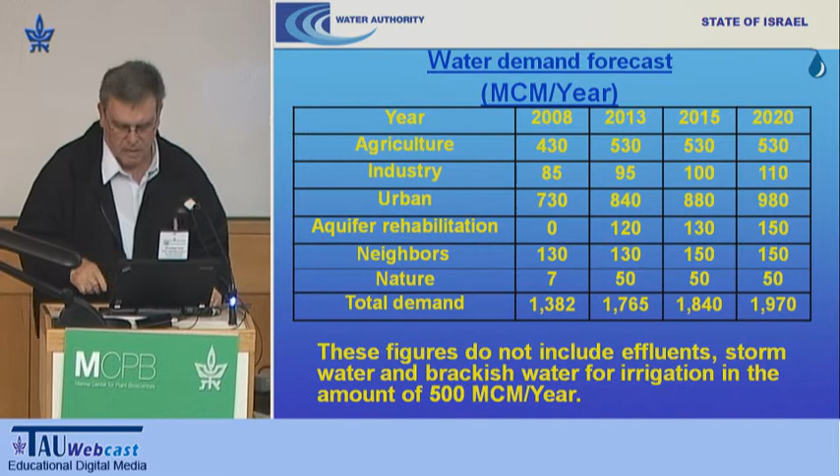Now on the other end, we have the resources. The resources in this number is not the amount of water that goes into the Jordan River. This is the refill in all our aquifers in Israel. We don't have here only the refill in the eastern aquifer of the mountain aquifer, but all the rest, what we have and what we are using in Israel. This is the average: 1.17 billion cubic meters per year.

So this is what we have. It's just an example. This is the forecast. This is the actual number we received in 2008. In 1 year, we missed more than 500 million cubic meters. 1 year. So we need to do all kinds of steps. And desalination is not the first step, it's the last step. Desalination is not a goal, it's just a means in order to close the gap. But we are doing other steps in parallel, and I'll talk about it.

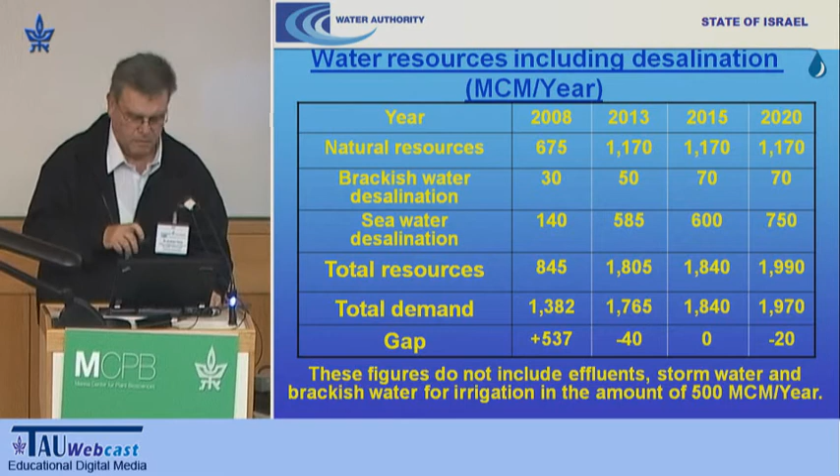It means it will not allow us to fill the aquifers, but at least be able to be in a situation that we have enough water, not to take more from the nature than we need, not to overpump ourselves. So this is where we want to be. I'll come back to it in a minute.

Now, in the past, we had a wonderful technology, since you are people that are talking also in technology, so most of them know the technology. Moses, our ancient leader, had a very wonderful, very good stick. He needed water, just hit the rock, he received water. We are still looking for the stick, so if anyone sees it, we'd like to have it. Unfortunately, we don't have it anymore. We need to do some other things in Israel. So what are we doing?

The first thing that we are doing, and we are doing a lot on this matter, is water saving. And when we are talking about water saving, we are talking first of all about education. We are giving lectures to the kindergarten, the elementary school children, high school children, then students in university, to be in a situation that the next generation will be adults that know how to treat water.

I can tell you, when I was in October in Paris, and Paris doesn't have a problem of water, I found myself in the hotel room. When I brush my teeth, I close the tap in the hotel, and everyone that visited Paris knows that water runs in the streets. This is the way they are cleaning the street, running water there. So the first thing is education.

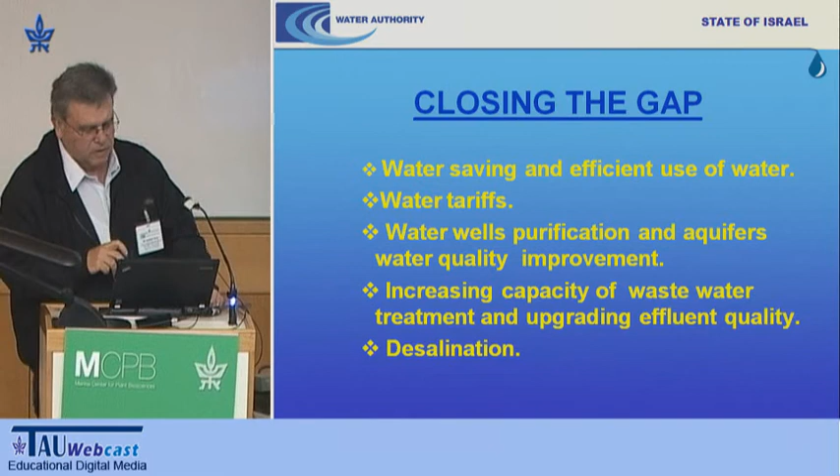The second thing that we are doing in this matter, a lot of PR, a lot of appearance on TV. Everybody remembers the nice girls that were becoming dry on TV because we really didn't have water. We are doing a lot of things. We are fighting against the water losses in pipes.

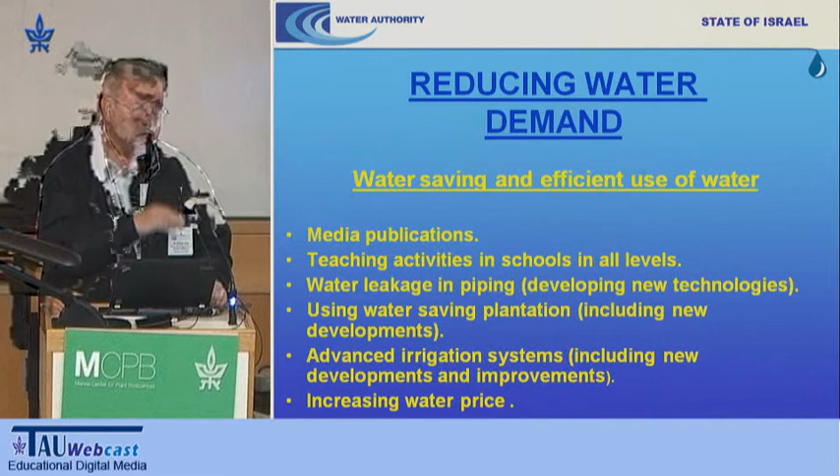In Israel today, our average water loss in piping is about 10%. This is a wonderful number. If you compare it to our neighbors, Jordan, Syria, it's about 40%. But not only them. Take London. London, about 40% water losses. London built a desalination plant because they don't have enough drinking water. Amazing, London. So water leakage, 10%, but we want to cut it down. It's still a huge amount.

Then we are doing a lot of work, all kinds of genetic engineering and other methods, to get not only the agriculture, but also the private gardening, to get plants that use less water. Irrigation systems. The drip irrigation was invented in Israel. Drip irrigation is very important in Israel. In Israel more than 90% is drip irrigated. In the United States, they don't reach 5%.

I visited Arizona last May. I was asked to tell them, why can we build desalination plants and they can't do it? I went there, I drove through the desert, and what I saw was amazing. The farmers there, the irrigation is flood irrigation, the same that is done in the rice fields in China. Go to Arizona, go down to Tucson, drive through the desert, you'll see amazing things. From the Colorado, they open a gate and they flood the area. No drip irrigation or nothing, because they don't pay even 1 cent for the water.

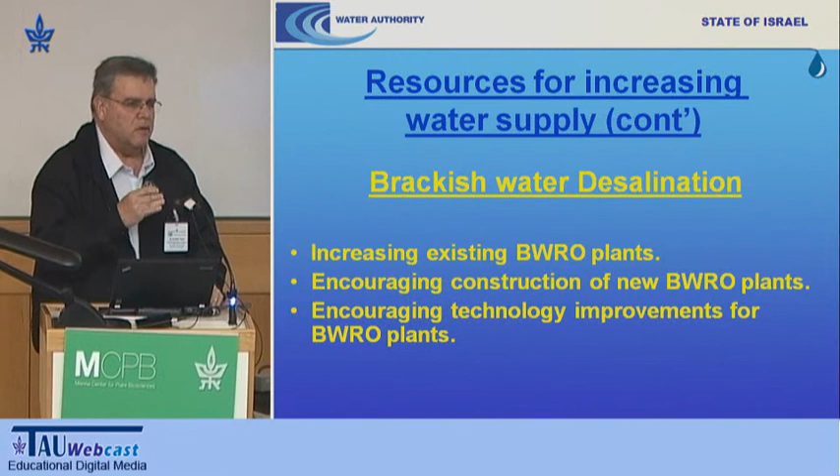Then, again, it's not enough. The gap is still too high, and that's why we went into large-scale seawater desalination, because we had seawater desalination for many years in Eilat. We had a small plant of about 2 to 3 million cubic meter per year. We still have such a plant in a different technology of seawater desalination. But to go into large-scale desalination, the decision was made only about 12 years ago.

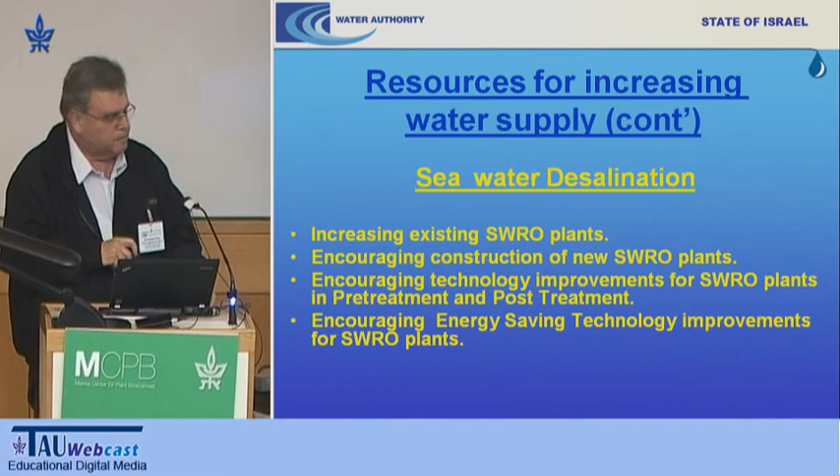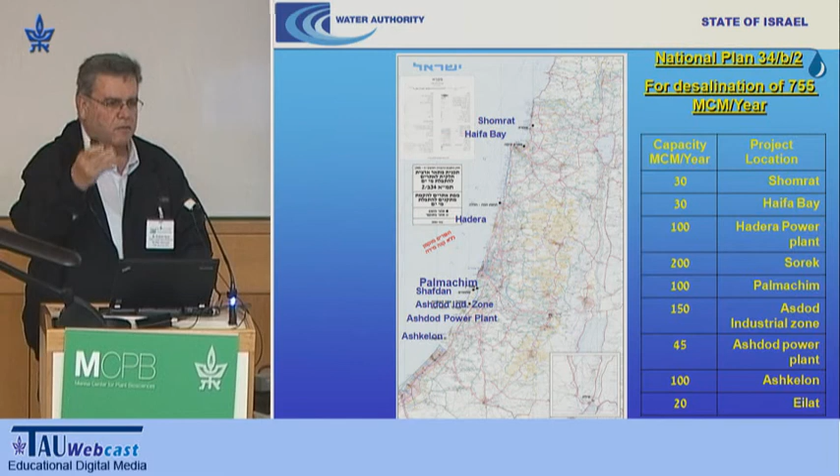To go into desalination, I'll talk about it a little bit later, we need space. We need area. Desalination plants take space. Not as it's published, it doesn't take space from the coast. Most of our plants are far away from the coast. Our new plants are about 2.5 kilometers east of the coast, but we need the space, and for the time being we have a national master plan where we can allocate desalination plants in different areas of Israel. This plan consists only of a possibility of about 750 million cubic meter of desalination. So we are now running a new master plan in order to have enough space for the next 50 years.

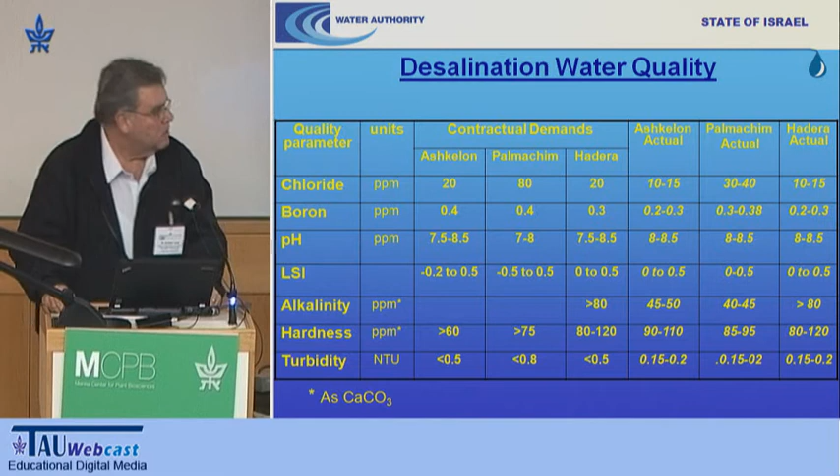A word on the quality of the water. Our drinking water today has average chlorides of about 270, 280 milligram of chloride. Then the addition of salts in the city brings us to effluent with about 400, maybe 450 milligram per liter of chlorides in agriculture, which is a huge amount of salt in agriculture.

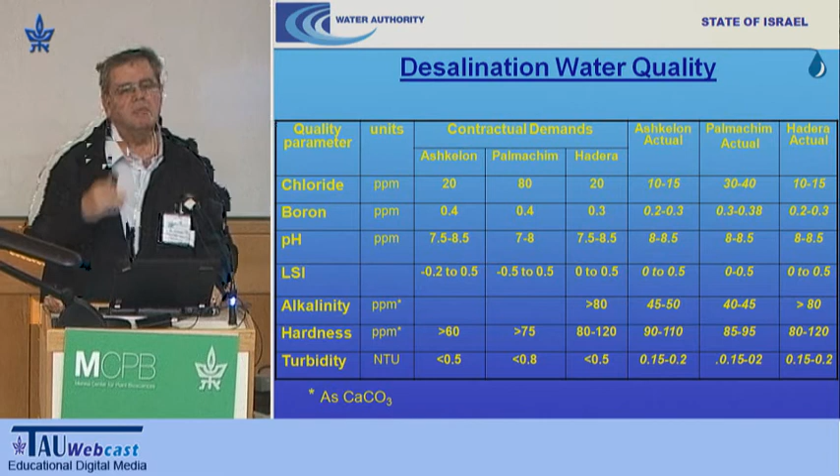By going into desalination and going out from these plants with about 20 to 30 milligram per liter of chlorides, the effluent will have less than 200 milligram per liter of chlorides. And there is very interesting research showing that if you go to the field with less than 200 milligram per liter, you get a better yield of the crops by about 15%, without adding any fertilizer, only because we are reducing the amount of chlorides, which means reducing the amount of sodium in the irrigation system.

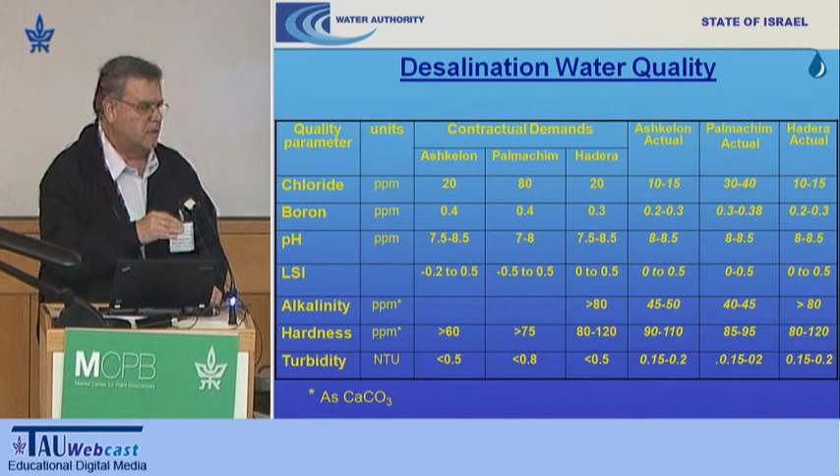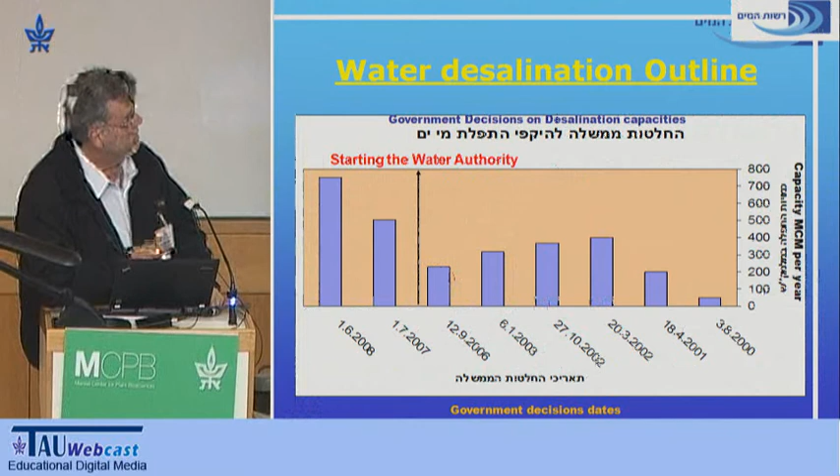But the government decision went up. This was 50 million cubic meter per year. In 2002, the decision was to go up to 400 million cubic meter per year. But then the years of 2002 and 2003 were rainy, a little bit more than average. And you can see they started to cut down by decisions the amount of desalination.

In 2006, we started already the series of drought years. This decision was to cut down desalination to 260 million cubic meter at all. That's it, in this number. And at this stage we only started to produce desalinated water.

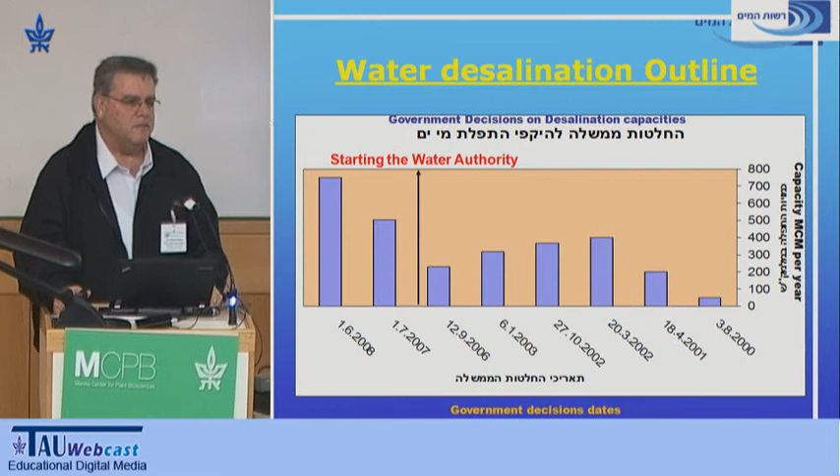Only in 2007, after the Water Authority was established and decided to cut the linkage between the governmental budget and the investment in the water sector by increasing the price of water, and this is going to be the base for every investment in the water sector, we succeeded to have the right governmental decisions, and the last decision is to reach 600 million cubic meter by the end of 2013 and 750 by the end of 2020.

How do we do it? Today we have already 3 plants in operation. We have the Ashkelon plant that started as 100 million cubic meter per year, which, when it started its operation in 2005, was the largest reverse osmosis plant in the world. It was the biggest one. Today this plant, Ashkelon, is producing 120 million.

And of course, all our plants are with reverse osmosis technology, and maybe you know that the person who really started with this technology and brought it to all of us was Professor Sidney Loeb, an American Jew who immigrated to Israel in the late 60s. He was really the one who started it. Unfortunately, he didn't write a patent on it, but he is really the father of reverse osmosis, and today more than 60% of the desalination in the world is with reverse osmosis.

The second plant, Palmachim, started at 30 million cubic meter per year. It's now producing 45, 50 million, and we are now increasing the capacity to 90 million. This is being done now. The third plant started in Hadera. Ashkelon started 2005, Palmachim 2007, Hadera started in 2009. It is 100 million cubic meter per year, but it's already producing now 130, and it is now the largest plant in operation in the world.

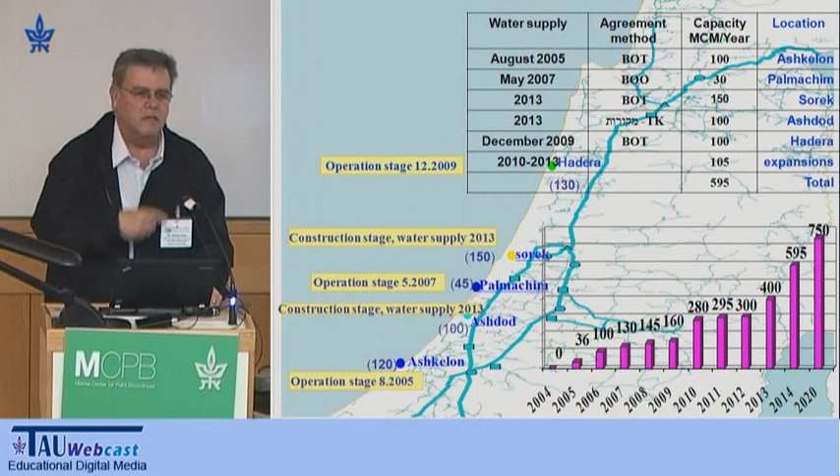Now Algeria is starting to operate a plant which is going to be about 140 million, and we have now the Sorek plant, which is going to be our next plant, at 150 million. You know, we have a hummus war between us and Lebanon, so in desalination we have also something like this. And beside Sorek, which is going to operate beginning of next year, we have another project in Ashdod, another 100 million cubic meter per year that's going to produce water by the end of 2013.

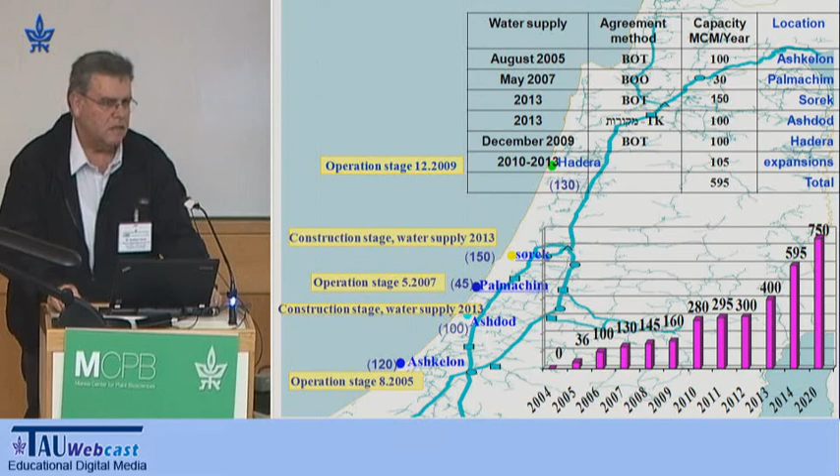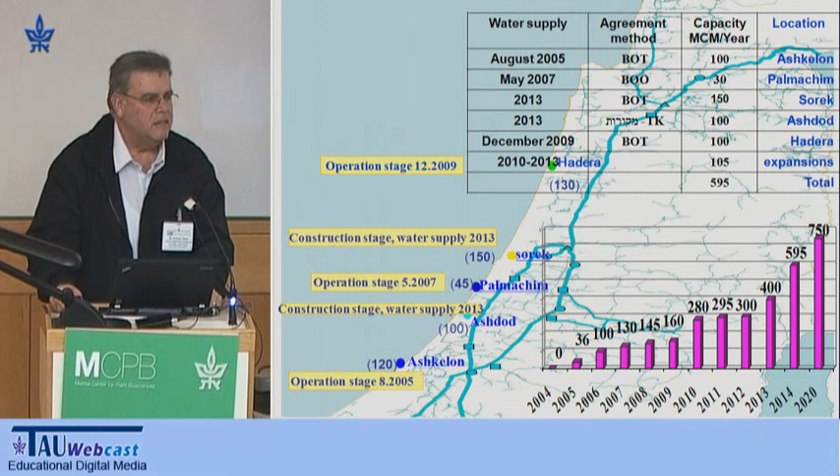So today we have about 300 million cubic meter per year of seawater desalination and another 40 to 45 million of brackish water desalination, altogether about 340 million cubic meter per year already running in the pipes. And maybe a small mistake was made here, we are pumping from the Kinneret in the last years only 150 million. This is what we are pumping out of the Kinneret. So by producing this amount of water, we succeeded probably to build 2 new Kinnerets in Israel.

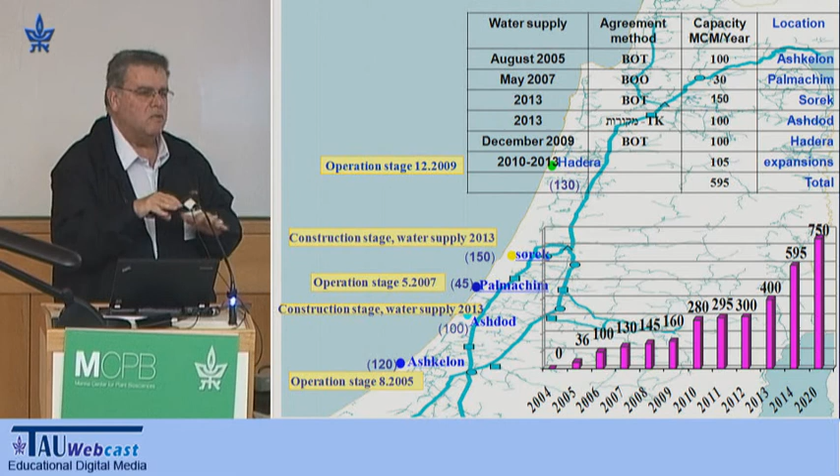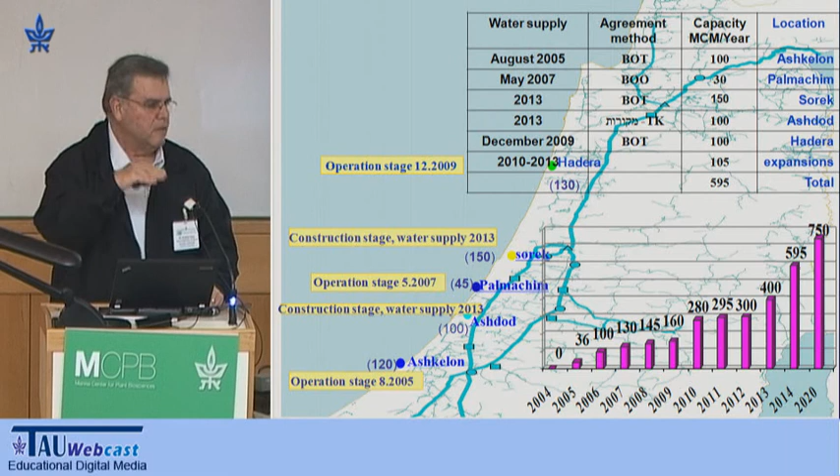And with the new plants by the end of 2013, with the addition of brackish water desalination, we will reach about 660 million cubic meter per year of desalinated water. So at that time, we will have the amount of water not only to close the gap, but also to start to pump less from the Kinneret and from the aquifers, by about 200 million cubic meter per year, and that will allow us to build up the storage that we have been missing for many years in these areas.

Just a word: in order to be able to send this water everywhere, we have a national grid. Fortunately for us, we have a national grid that was built 50 years ago. And at that time, this was the only means to get water wherever we need in Israel. So this national grid that started in 1954, 1955, is still working now, but the big problem is that it was built as a telescopic pipe from the northern part to the desert.

Now today, when we are going into desalination from the west, we are doing a huge project of changing the directions in the national grid to the west, to the south and to the north. It means we are changing direction in the national grid. This project alone is a project of about 15 to 20 billion shekel for the next 10 years.

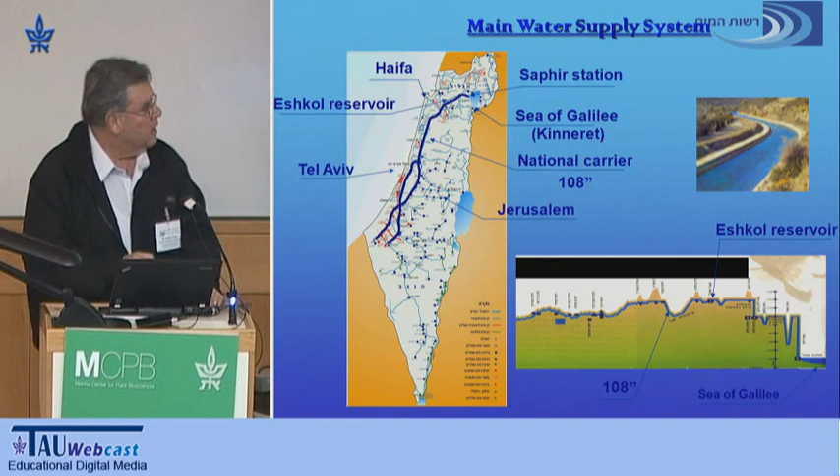I'm just jumping over all these interesting things.

Energy. Just a word of energy. Wasn't it smarter to build the desalination in the north? It's a very nice question. We are trying for 3 years. First of all, you build desalination where the demand is. Most of our population doesn't sit in the north. Unfortunately for us, it sits near Tel Aviv. So there is the major capacity.

We are trying to find for 3 years a location in the north, in the western Galilee. 3 years. We didn't succeed to find 100 dunam in Israel. I would like to get all the assistance we have in this matter, but it's not so simple to find 100 dunam in Israel, and the big problem is that nobody wants to have it in his backyard. You know, NIMBY. So this is a huge problem. Everybody wants water, but build it in the neighbor's garden.

A huge problem. Energy, and everybody says that desalination is a huge amount of energy. So let us make things clear. In Israel, not only in Israel, the same in the United States, about 40% of the electrical energy goes to air conditioning. More than 40%. All the water sector in Israel is today about 6%, 6.5%.

All the water sector. If we'll cut back 1 hour of average air conditioning, home air conditioning, that's enough energy to produce 1 cubic meter of desalinated water, which is enough for 1 week for us to live. 1 week per person, 1 hour of air conditioning. So if you want to look where the coin is, the light is in the air conditioning, not in desalination. Cut a little bit back the air conditioning.

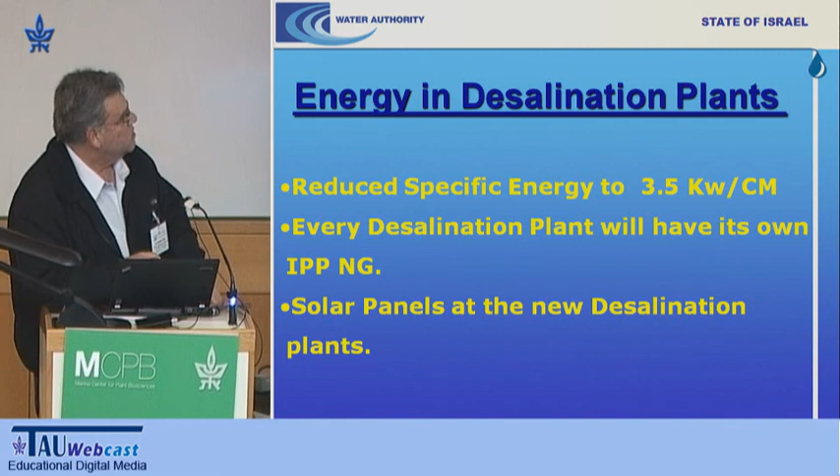We have more than enough energy, but it's not enough. We are doing several things that I'm not going into. We're going into renewable energy. We're going to use natural gas. We have already one desalination plant with a natural gas power plant, which also helps. Again, I'll not run into this.

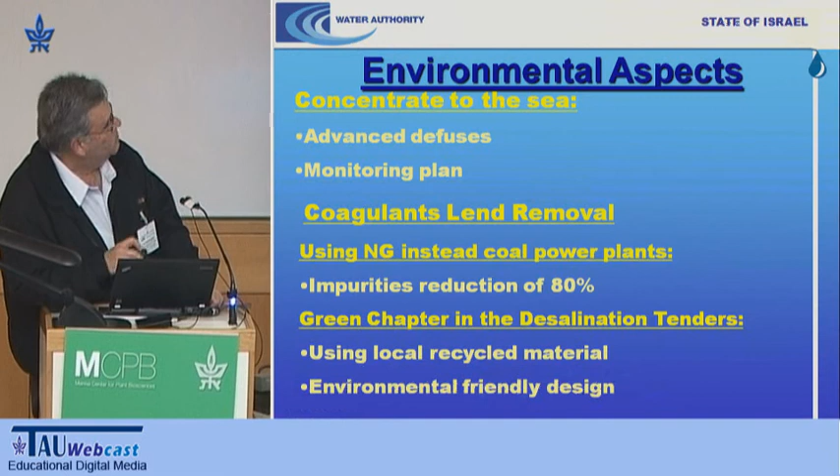Sorry, the last word I want to talk about is the real environment. Usually I give environment more than 1 minute, but here I'll cut down. Environment. The desalination plant, of course, has an impact on the environment. Mostly it is the energy. Of course, you need energy to operate such a plant, but we are also sending concentrate into the sea. The concentrate that you are sending to the sea is about twice the average concentration in the sea.

It goes into the sea. It has a huge dilution effect. We have a huge debate with all the environmental guys in Israel. We believe that the effect is not so big. We are monitoring it all the time, not we. The Israeli government and all kinds of Israeli entities are monitoring it. We do see a dilution zone where the concentration is a little bit higher, and I'm talking a little bit higher is between 2 to 5% more than the average salt in the sea.

Again, for each huge desalination plant, this mixing zone is about 200 dunam, 200,000 square meters. That's it. It means when we reach 1 billion cubic meters of desalination, we will have an influence of about 2 square kilometers, out of a few thousand square kilometers in our seashore. But this is something that we need to monitor, we need to take care of. We don't know enough yet on this matter.

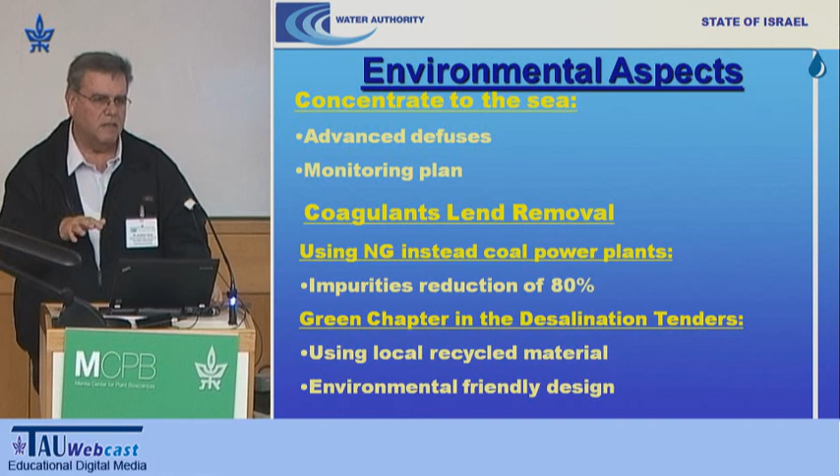Thank you, Avraham. I'm very happy that you have been considering at least 1 minute the environmental consequences of the long-term effects of desalination. This is one of the main concerns of the environmental groups. But we have time for one question. You want me to ask a question?

Yes. How long will these plants last, and what will be the cost once the government gets them? Okay, these plants need to last as long as possible. After 25 years, when the government is going to get them, they are going to get them in the best operational situation. It means we're going to get plants that are maintained and operated in the best way, and we are controlling it all the time. This is part of what the WDA is doing, controlling the way that the private sector is working so that when we get it, we'll get a very good thing.

But in 20, 25 years, technology can change, all kinds of things can change. We'll need to do other things, but I believe that these plants, as they work, will still work. Look, reverse osmosis is not a new technology. The new technology is 40, 50 years old. In the water sector, technology doesn't change quickly. So we believe that in the next 30, 40, 50 years, we will still have reverse osmosis technology as the right one. Okay. Thank you.